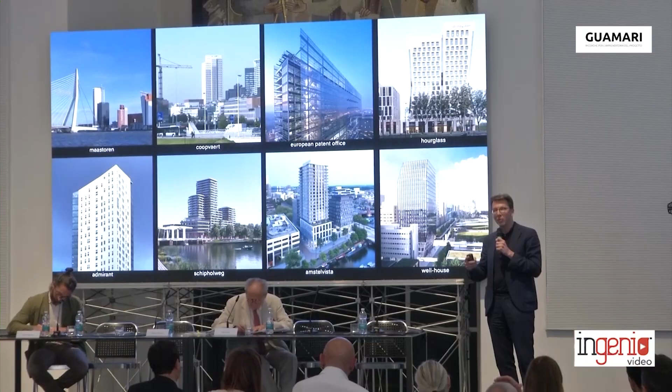And I think with the tallest buildings in the Netherlands, again, not a big deal, but still we've been involved with those over the couple of years.

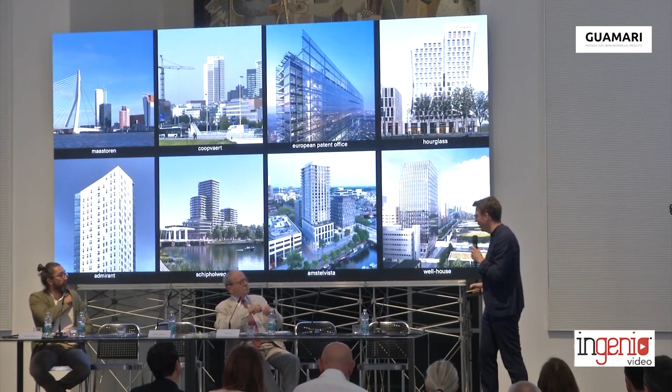And I think the chance for tall buildings - I don't think a tall building is the answer, but it can be part of an answer, and it can be part of a very specific answer in the Netherlands, and it can address future social needs in a very specific way, especially if you look at the Netherlands. We, as the Dutch, normally see them as individual cities, but if you zoom out just a tiny bit, you can see that actually it's one city.

It's mixed use, but mainly it's affordable housing, and it was part of a competition. There were 3 pitches, and our strategy in this one with our real estate developer was: can we propose the smallest possible building with a business case? Because the majority vote in this competition was for the residents - they would decide which project was best.

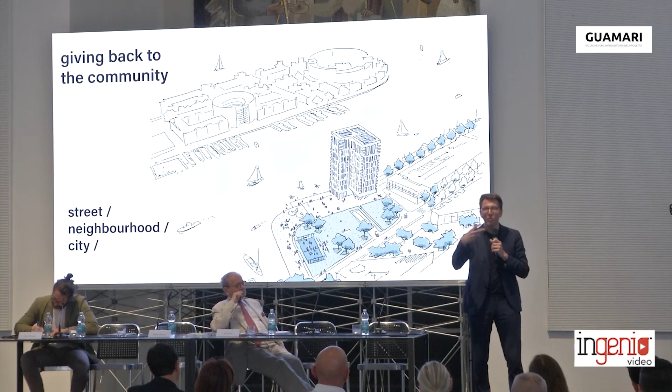So basically we took a lot of effort, and in a very un-engineering way chose the hardest solution by building a tower inside the water, but giving back public space. And I think that also aligns to the total conference here of the day, because we were able to give back a playfield and a little park, hence getting the majority vote of the local residents.

And this same approach we did of giving back with Zalmhaven in Rotterdam on the spot. It took 20 years. Yes, 2002 to 2022. Actually, it's my first project.

So you could say that you grew with it. Yes, there's this - I know we're short on time, but the anecdote is that I came from TU Delft and the project just started, and I was sort of given this project - well, how can you do this? And I said, is this actually very smart to have a graduate work on the tower? And our founder said, Haakon, don't worry, it will never happen. So anyway, but here we are. It's an academic experience. Yeah, exactly. Fruitful? But then eventually it got built.

Eventually, yes. And the nice thing, it addresses the shift of the harbors of Rotterdam more to the west, outside of the city. And with this tower, we're able to address more the city towards the river. I mean, a tower is nice, but it's the river that's the identity bearer of Rotterdam. And for the urban plan, it functions like an urban pivot, really connecting different parts of the city. So yes, solitary, but also part of a larger project, and really addressing more towards the water and the river.

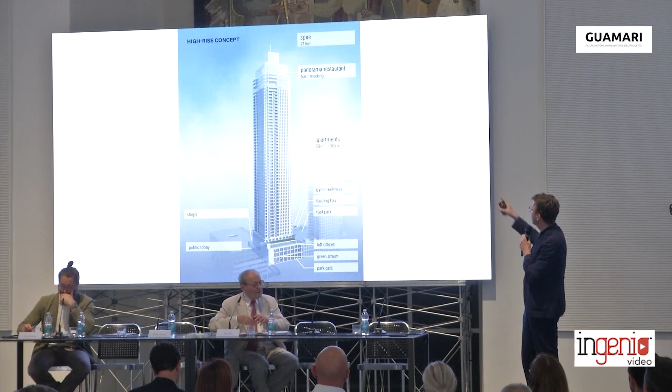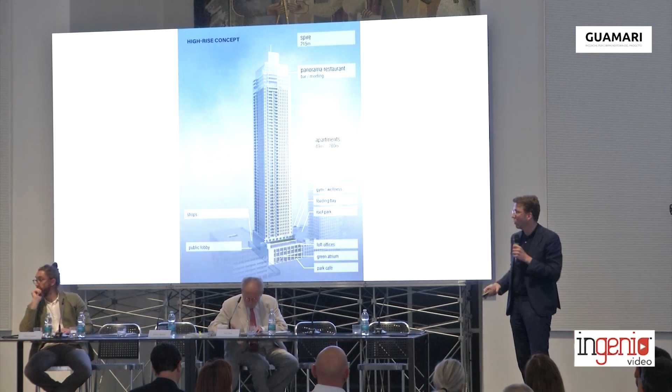It's mixed use, mainly apartments, of course, in a large spread, but also offices, commercial, and the thing I'm most proud of is that we were able to give back a restaurant on top. The easiest thing is always to position a penthouse on top of a tower, and somebody's always saying this in a process like 20 years. But the nice thing here is that we were really able to give a place where you can have coffee, also for local residents. That's why one of our first models I wanted to show - it's also giving back on street level, and giving a public lobby that connects the street to a new park that the city is developing.

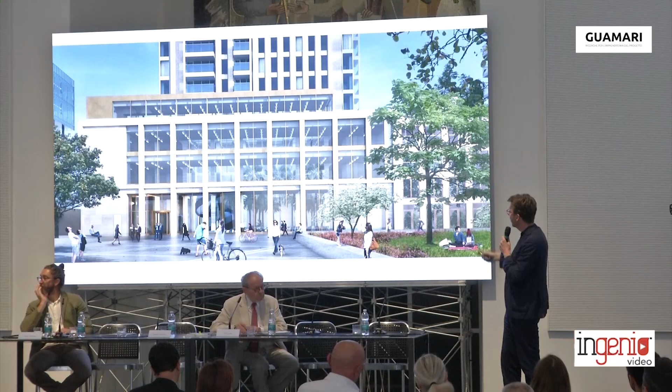You already see the winding staircase for people going up to the restaurant, so the flows don't mix between residents and people going to the restaurant. There's just the ground floor with the functions, also a loading bay inside, and then the function around a little atrium.

Just as a sequence - this is also us Dutch watching too many American movies. It's really this idea of being welcomed and entering to a doorman towards a lobby inside for the residents themselves, a winding staircase going up as a flow through this little atrium, with a view on top so you actually know. It's not a generic thing, you actually know where you are always.

So from a duplex typology towards a restaurant, giving something back in the crown.

To develop this actually took some engineering and development, because once you think of a tower in the Netherlands, you also have to think of what it stands upon - the soil in the Netherlands is just water, to be honest, and the Zalmhaven is there because it has piling of 65 meters underneath it.

So from a carbon position, or a development position, or a building position, you're always set back immediately. It's like you enter the competition already 2 or 5-0 behind, and then you have to compensate - you have to engineer really well.

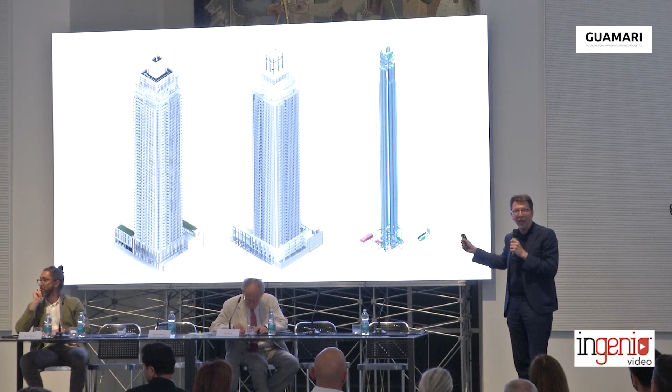This is the lesson we really learned on this project - it's almost like an episode of Dr. House, where you don't know exactly what's going on, but if you make the conditions worse, you really know what it is. And that's our soil, basically, in the Netherlands.

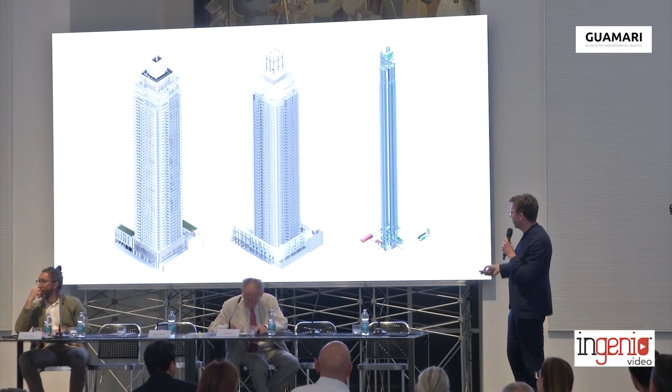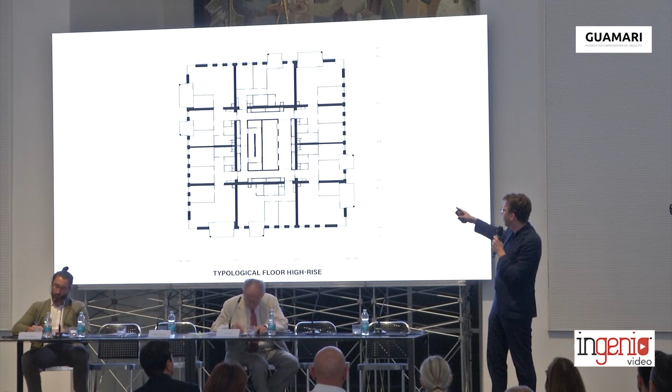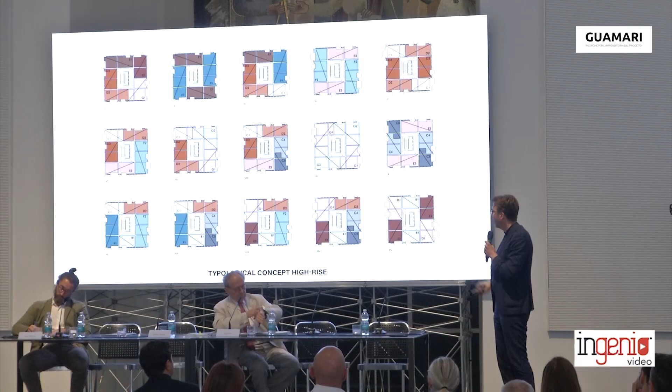We had to engineer it integrally and work from the beginning, seeing this as a floor plan in a very utilitarian way, because when we started off we didn't know what the typology would be. It had to fit many options, so basically we optimized for total flexibility, with a plug-and-play system of a typology that could fit almost like Lego blocks right up to the very moment, with open corners, giving back something, and outdoor spaces right up to very height.

This is in the Netherlands context, of course. Engineering this part was the most vital part - this corner connection, where you have a balcony and the corner, which had to be mocked up with 2 stories to really see those connections.

We did this because we knew from the very start it had to be able to be prefabricated to make the time window within this plot. So it was built with a self-raising hoisting shed, which raised itself every week, so we were able to develop one story every week - basically making up for the time lost with piling.

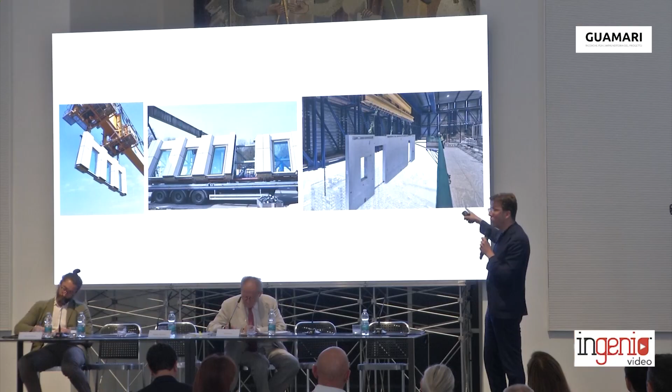Elements were made in the south of Holland, just outside of Eindhoven, brought on a lorry to a logistics area just outside of Rotterdam, and then delivered on-demand to this hoisting shed. It's a conditioned area - you can see the snow there, into the self-contained element.

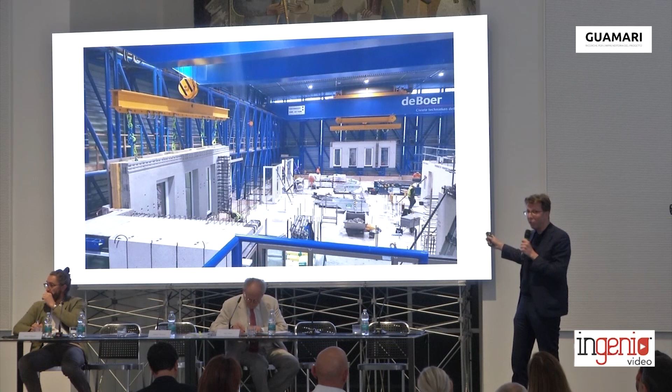During COVID time, there were no delay days - not for wind, and also for safety for the local residents. This really proved the vital point. By the way, it's modular, and if you really want to, you can rent it from that company, De Boer.

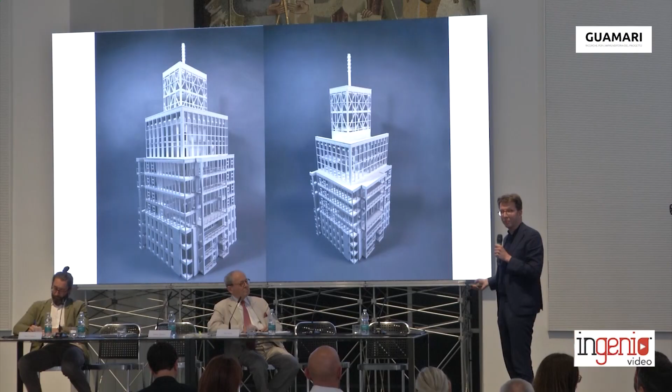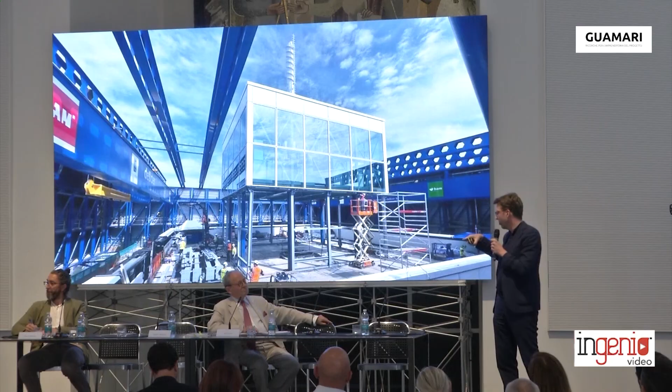Anyway, the biggest challenge was, of course, building the top. In terms of engineering, here it came everything together - the top is reversed, so actually the spire was built first, and then the top was jacked up. I'm not going into the difficulties with certification, etc., but this was really the solution.

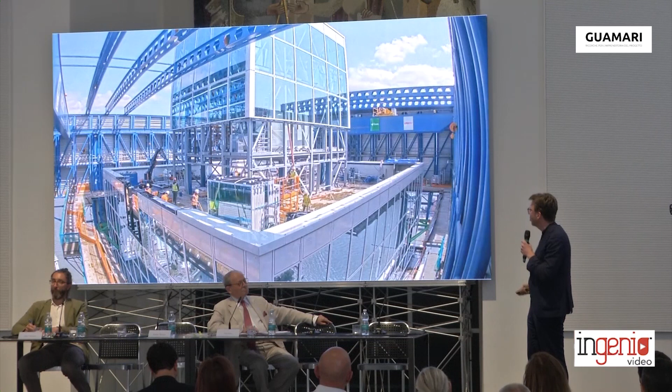And here you can see the self-raising shed lowering itself again. And this, my whole point...

Does it happen that the clouds get so low that it sticks out? Yes, it does. Yeah, it's the Netherlands, come on.

My little shift here is that we're using this engineering mentality now for our timber hybrid buildings, because the conditions there, and also in terms of prefabrication, are even more strict.

So you're able to do some magical things, also building a tower on top of an existing parking garage while the next door office building is still in use, in terms of the lightness of such a tower in Amsterdam, connecting an urban axis that wasn't there until recently - really having a specific intervention, giving more public space at eye level, and really fostering community.

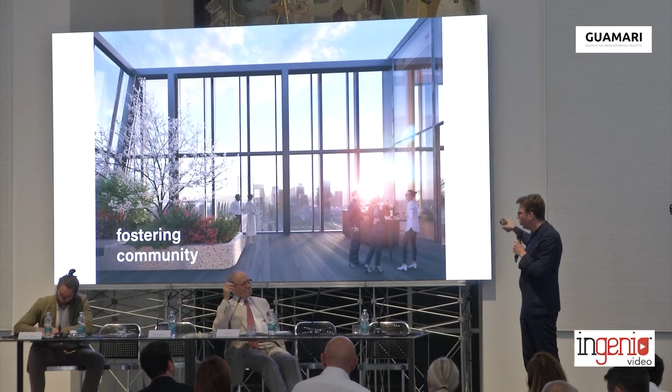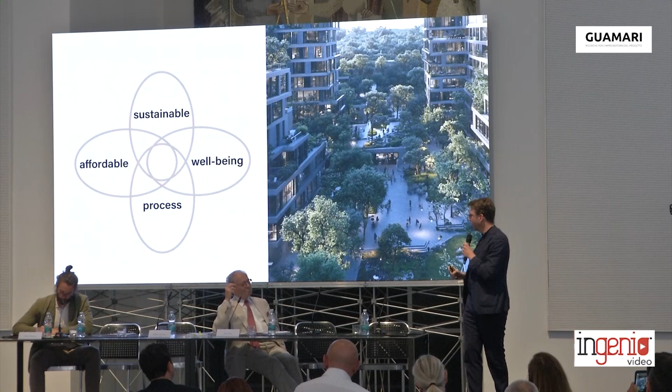Because all of these, to my mind, and perhaps also yours, are means to an end. To get to the center of everything that drives us and our community, we have to do this in an integral way - I dare say a holistic way - because we have to bring affordability, sustainability, and process together. And in the end, it's all about well-being. Thank you.